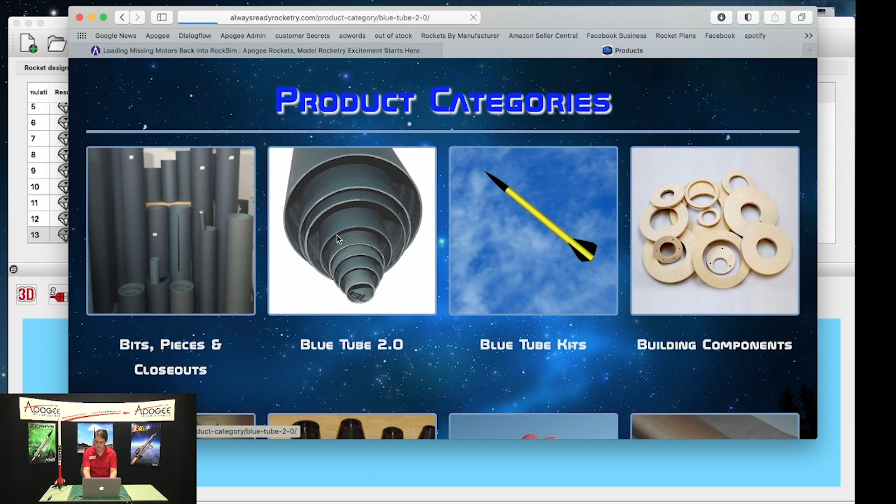The Blue Tubes are already in RockSim now, so this is different, but there are some manufacturers that are not, and you might be able to download the files from there. I deal a lot with the customer questions about, not how to do simulations, but more like I'm having a problem or this isn't in, so this is more of my knowledge base here. So to get to the file, hopefully he hasn't moved it. So here we go. Download the latest Blue Tube. We want to download.

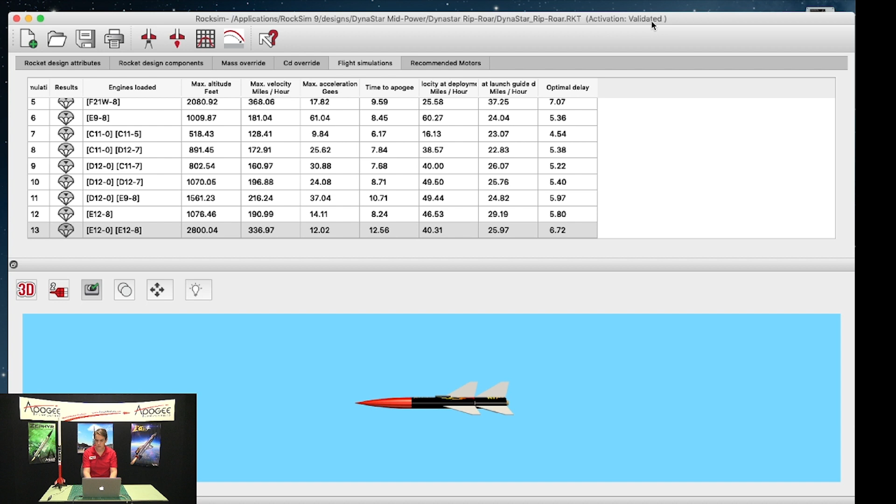So you can always do what I showed you before about moving them in there. The only thing is this will also be a body tube file, so you don't want to overwrite your existing body tube file. So the way to do it in RockSim is just make sure that this didn't download as a zip file. It needs to be unzipped. So if it is a zip file, you will need to unzip it before you start the import process. Looks like it downloaded as just a regular folder.

So what we can do to add files to RockSim, another way besides the way I showed you before, is to go File, Import, Database Files, and you can import motor files this way too if you load them from somewhere like ThrustCurve, or if you make your own motor, say you do experimental rocketry, or even if Aerotech or Cesaroni comes out with a new motor and it's not in the database, you can add it this way too if you download it directly. So yeah, we'll go File, Import, Database Files,

and the merge from path, in this case, we'll want to go to where we downloaded the file. So this is downloads, and that file, oops, was called the BTRS data. So we'll click open, so that we're pulling the new tube files from here. And then this checkbox says only import new materials.

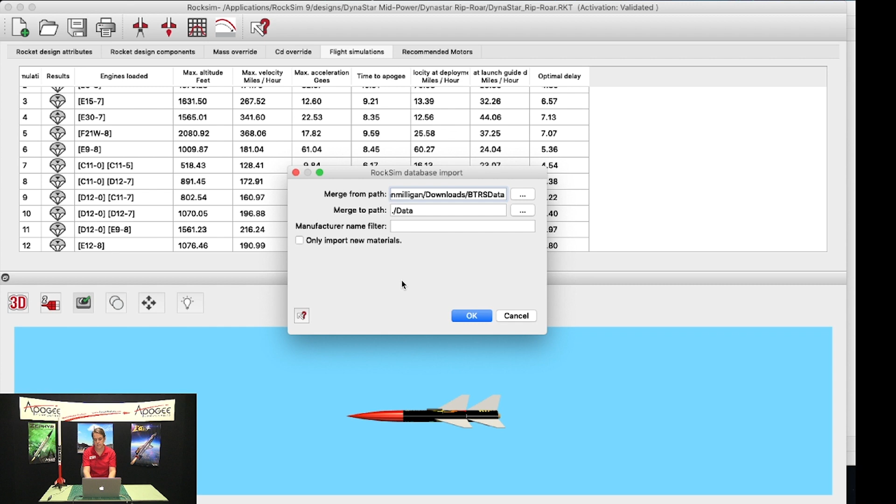So in this case, if the Blue Tubes are already in the database, then it won't import them again. But if say there's one new tube, it'll import the one. I'm pretty sure that our database has a different naming convention, so it may not recognize that they're already in there. So we'll just uncheck that. And then you click OK, and it will import.

And you can see here, because this was body tubes, it added 9 tubes, but nothing else really changed except tubes and couplers, because that's all Blue Tube is. So if you ever come across some parts files that you want to add to RockSim, it's really easy. Just get the parts databases, File, Import, Database Files. Same thing with motor files

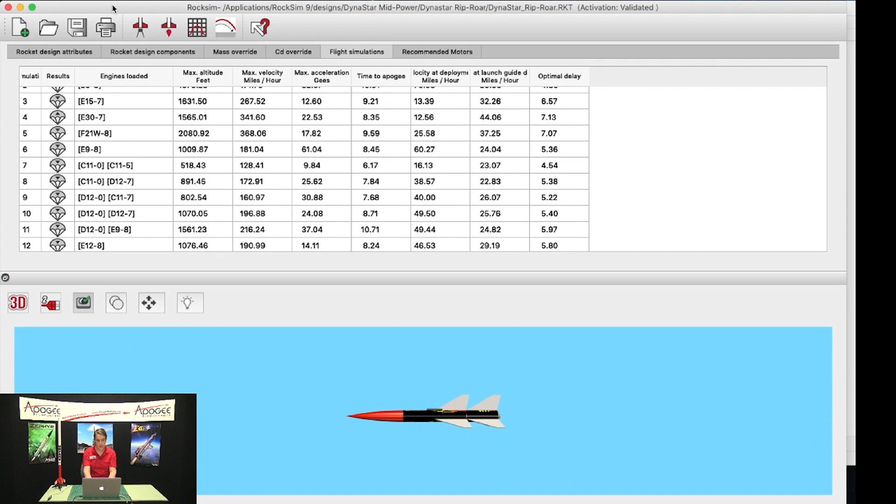for that. So another way to get motor files, if you're missing them too, you can go to thrustcurve.org and download them. I think I got rid of all my windows. And then that process would be exactly the same as what we did with the parts file. You can look up the motor.

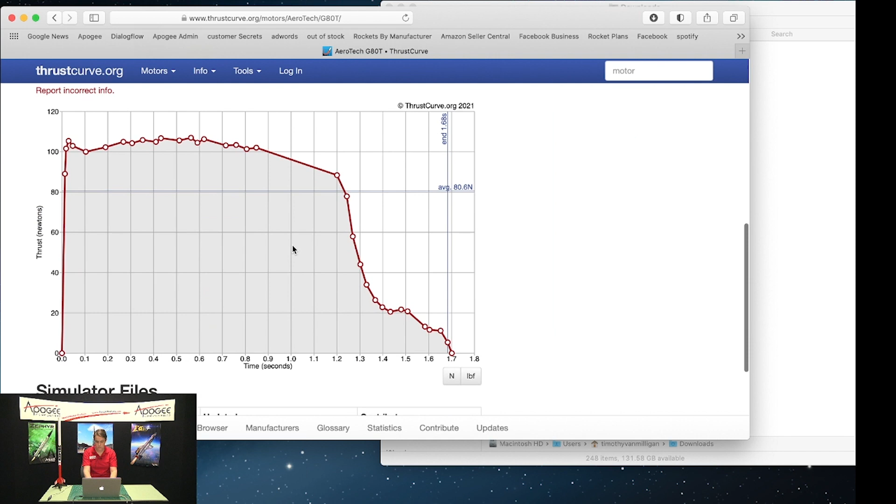You can search there, find the motor you need, make sure you get the right manufacturer, and when you click through and come down, the RockSim file, download there, and click that, and then it'll actually download from this page. They just updated this website, so I always forget how many clicks it is.

Okay, so I got my motor file there, so I can very easily in RockSim go File, Import. In this case, it'll be engine files, and then go back to my downloaded motor file, click Open. We've had a number of schools ask these questions, so I'm just kind of covering the basics.

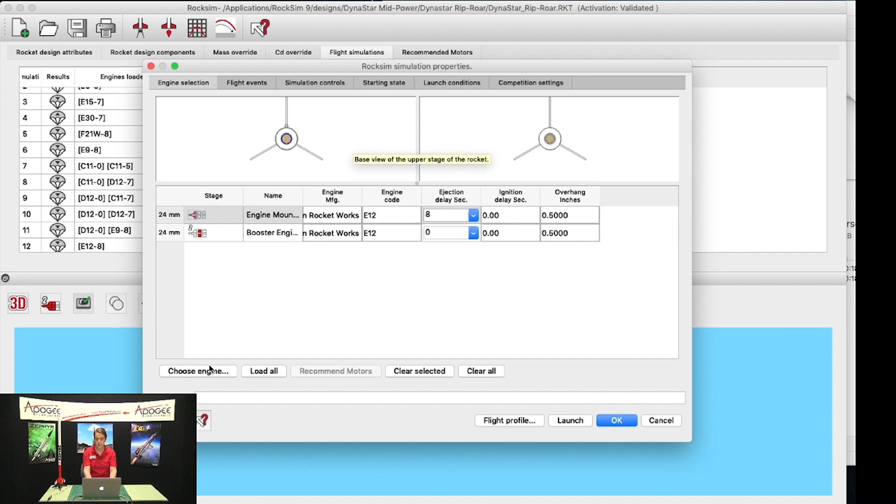So we imported it, and then you have to move it from the left to the right to actually activate it in RockSim. So when it's on the left-hand side, it's loaded into RockSim, but it's not activated, so you won't see it in your motor file list until you move it over. So once I've moved it over and click OK, now when I go to load an engine in my rocket, it will be in the database here.

The other way to get motor files, if you're missing individual ones, and this would be a pain to do if you're missing all of them, is you can actually go File, Reload Engine Data, and click the tab for Download Engine Data, and search from here. And so I usually just use the common name. It's the easiest way, unless you know the exact name. And sometimes people put them in differently.

So like Cesaroni motors start with like 120 G80 dash things, and if you don't have that memorized, it's hard to look up. But if you're just looking up, let's do an F120, start search, and then it found one motor. But you can see if I would have looked it up under the actual name, it said 56 F120. I never would have found it that way. So the common name is just the easiest.

Then we'll just download selected data. It's going to want to save it, so just click save. And then when you come back here, same deal. If it's on the left-hand side, you need to move it to the right to actually activate it. So now that motor is in there.

And that's why you wouldn't want to do this if you're missing all your motor files, because you would literally have to do every single motor individually, or kind of as a group, and that would be kind of a pain. The better option is to use our website and just download the files directly from there.

So looks like our pre-recorded video from Tim is not going to be available today. Just lots of computer problems this week for some reason. So let's see, does anybody have any other questions about RockSim? I'm trying to think of some other ones that have come up recently. Tim had the list and I didn't get it from him because he had the pre-recorded video, so I don't have the list in front of me about what questions there were. Let's see.

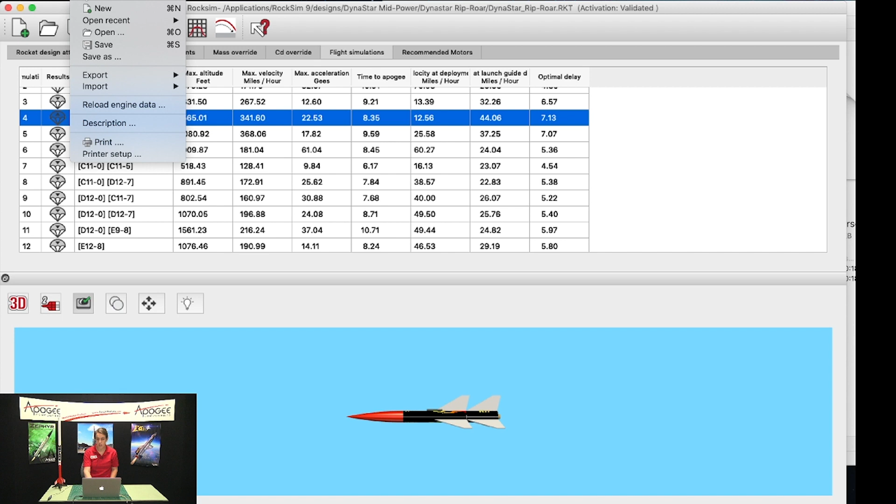I'll show you a little tip that's in the video that Tim did, but we'll just kind of sneak it in. So one of the issues that's coming up when people go to print in RockSim is it seems like it's not printing. So I've got this rocket and say I want to print templates or something from it. I go to File, Print, and then this screen shows you all the different things you can print for this kit. So you can do rocket drawings, the side view, the top view, the base view,

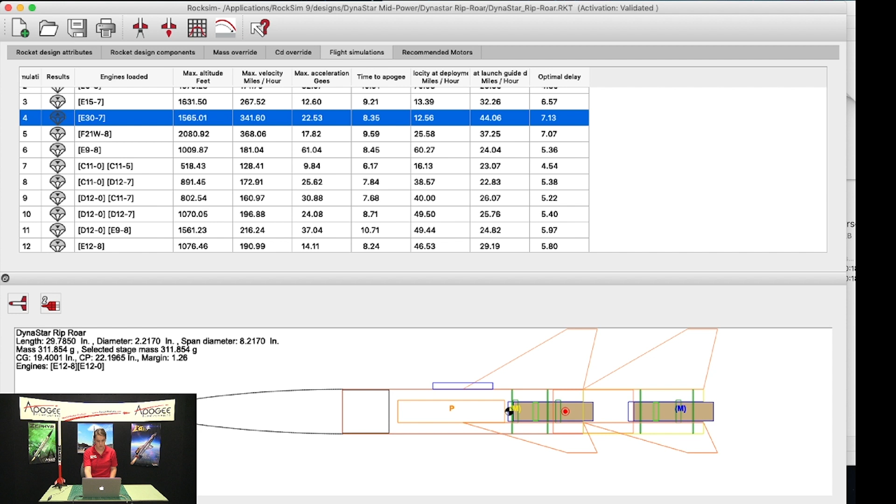Rocket drawings, if you want the side view, you can. Just be aware the rocket drawings do not print to scale. They size to your paper. So the way to actually get a scale drawing, we have a video tutorial on the tutorials page on how to do that. Basically, you have to export or print to PDF the view, and then put it in a drawing program like Inkscape or Paint, there are free ones out there, and then scale it from there. So unfortunately, it's not one click and done, but it can be done.

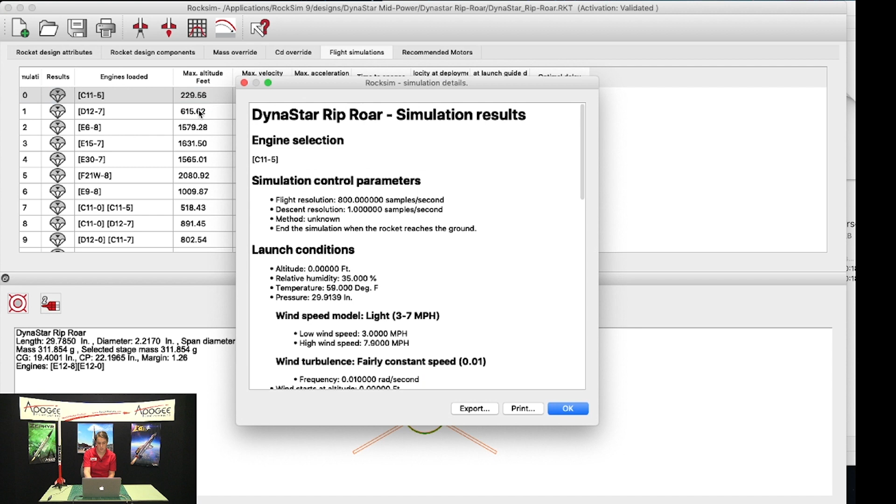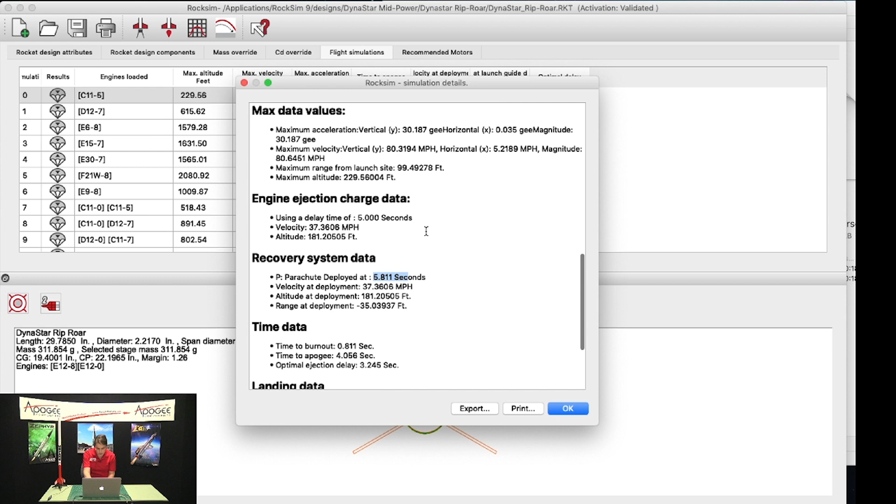So this one has the down arrow, and if we go into the display details, so flight details. The parachute deployed at 5.811 seconds, but let's see here. I'm looking for the Apogee time. Oh, time to Apogee there was 4.056. So it deployed slightly after Apogee, basically on the way down.

So if you think of it this way, the arrow is pointing down because the rocket was going down. So your parachute deployed slightly after Apogee. In this case, it was about a second later. So the rocket's starting to pick up speed again, which, if it gets to a certain point, can be dangerous because your parachute could rip off. But 1 second is usually the wiggle room area that works okay for that.

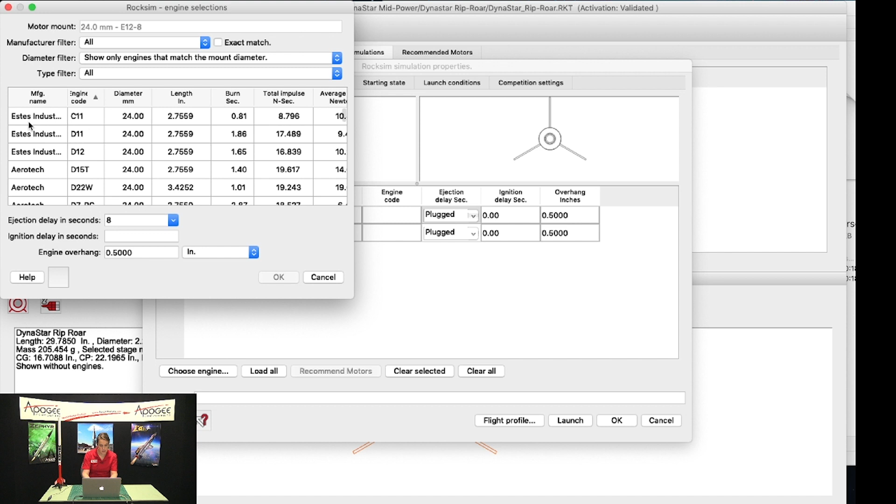Let's see if we have any other. Let's choose a motor here. Oops, let's clear all. So let's choose an engine and put in a really short delay, like 1 second, just to show what that looks like. Oops, I typed in an 8. So in this case, this rocket crashed. You can see the rocket's sort of bent in an L shape and there's a little X. This rocket crashed because, I assume, it was already on the ground when the parachute popped out. So that little icon tells you that.

And if you want to, you can go to the 2D flight profile and see the visuals of this too. So if you run the simulation, we're waiting for that parachute to pop out, and you can see it hit the ground. I'll pause this. It hit the ground at 7.88 seconds, but our delay was set to 8 seconds, so that's why it crashed: the parachute came out too late.

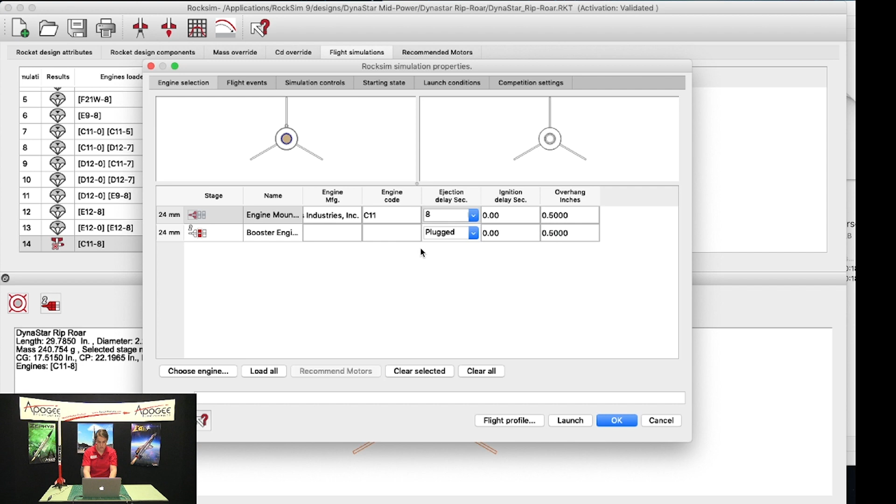If I change this to 1 second and we launch it again, you will see that in this case, we've got the little parachute icon with the arrow pointing up because the parachute popped out while the rocket was still going up in the air. And since our apogee was about 4 seconds, like it showed on the first one, it popped out 3 seconds early. And you can see when you look at the data the speed at which your parachute popped out. So when it popped out after 1 second of delay, it was going 50 miles per hour.

And 50 is about the breaking point for a lot of parachutes, where it's just going to rip that parachute directly or zipper your rocket or something, because it's going so fast. Like throwing your hand out the car going 50 miles per hour. Think about how much force is on that. That's what your parachute's going through there.

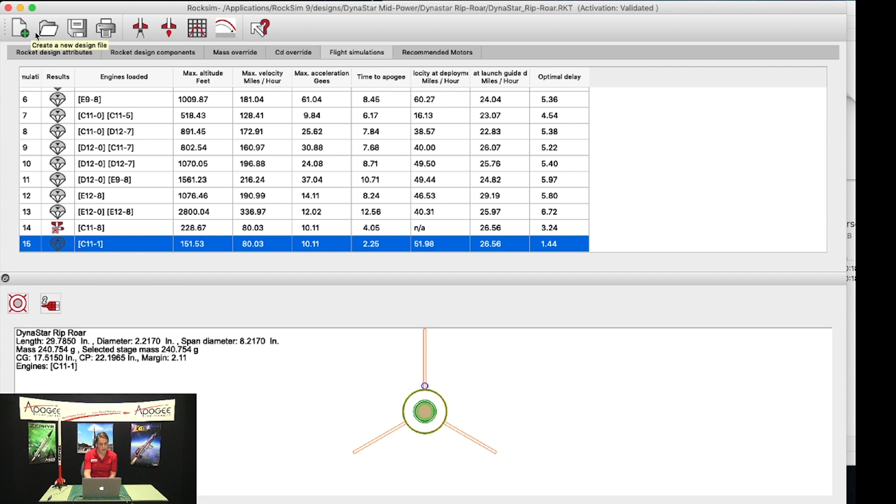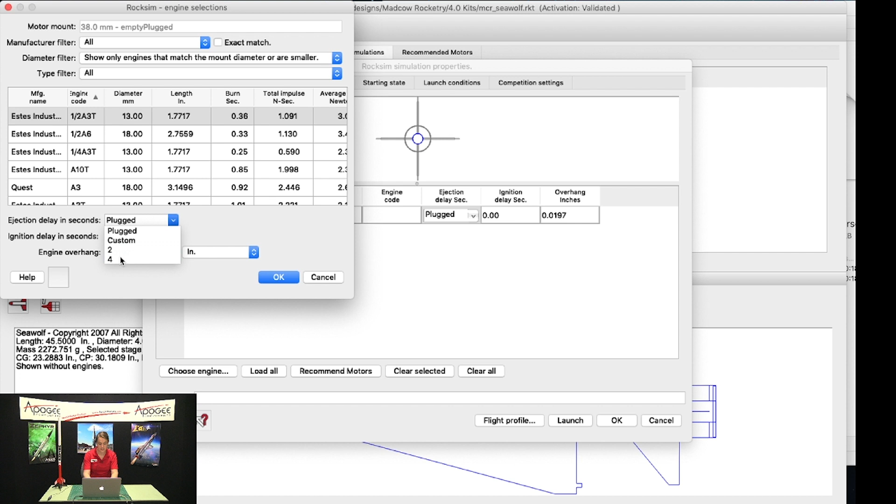Then another icon that shows up. Let me pick a bigger rocket. Actually, let's go here. Really heavy rocket. Oh, it's in my version 9, so that's okay. So this is a 4-inch diameter rocket, about 4 feet long. And I'm gonna throw a 1/2A into it. So this motor is supposed to launch little tiny rockets, and we're putting it in a big rocket. And then we're gonna go ahead and launch this.

So as expected, your little tiny motor is not gonna be able to launch your giant rocket. And so what you get is this little icon. This is a rocket with an X next to it, basically saying we couldn't get off the ground. It's not working, something's happening. In this case, it's just because you put a tiny little motor in a big giant rocket. So that's what that means.

And usually you can check and see a couple reasons why that might happen. Or if you get a launch that only goes, say, 30 feet, you put a motor that's the appropriate size in it, and then it goes 30 feet. Things to look for are check your launch angle when you're putting your motor in.

Under starting state, your launch guide length, you've got the length there, but also the angle. Like this is angled 4 degrees into the wind. There are some times where people get really confused because their rocket doesn't launch at all. Everything looks good, or it only goes like 30 feet and they put an M motor in it or something big. And what it is, their launch angle is 90 degrees. So the rocket's launching, you know, horizontally.

And so it's basically launching across the ground. And so obviously your rocket's not going anywhere if you're launching it this way. You're not going to get any altitude. You might get a little bit if it's a little up, so you may see that there. So check your launch angle.

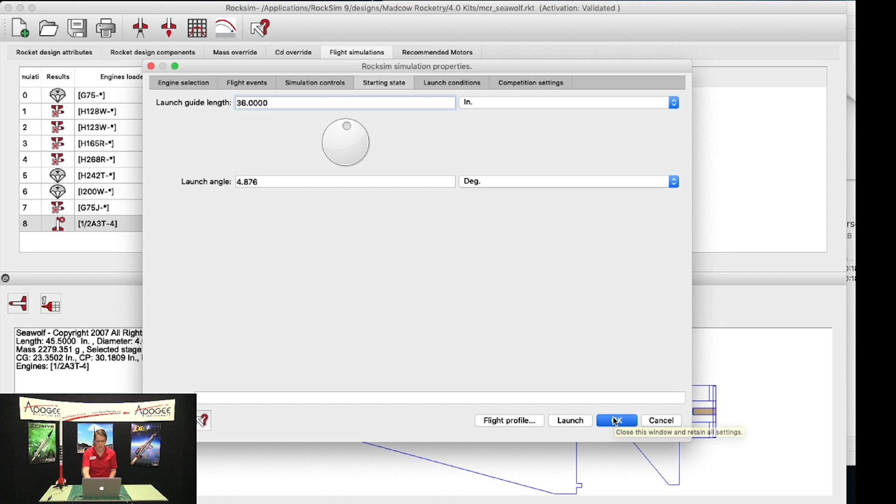Obviously check your weight versus your motor. Sometimes it might be as simple as one of your parts is really heavy. You don't realize you grabbed a fiberglass version of a part instead of a paper tube or something. So those are things to look out for if you get those.

There is another icon that will show up, and I don't have a quick and easy way of generating it that I can think of, but it looks kind of like the rocket, except it has no nose cone on it. So it's just like a rectangle, and it's kind of all gray. And then usually with that, you'll also get NaN showing up in your columns. NaN stands for not a number.

We see that a lot, especially with older designs, and the common cause of that is one of your parts is made out of a material like custom, that when you go into the parts database, you go in here, and material, instead of saying polystyrene or balsa or whatever, it literally just says custom. You can also have problems if you have a material in here that's not actually in the database.

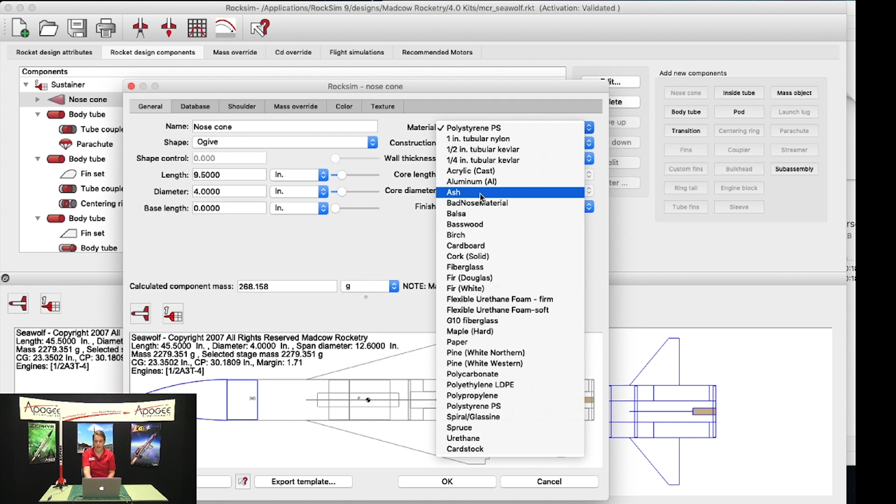That happens if you get a kit file from somebody who added a material to the database, and say you're making something out of a really odd wood, you know, carve a nose cone out of cherry or something. And you make that, and then you send the file to your friend who doesn't have cherry as a material in their database. So basically, usually it's something in your parts file that will make it go NaN.

Essentially one of your ingredients in your rocket has a material that RockSim doesn't know what it is, so it can't calculate the density, which means it can't calculate your center of gravity, which means it can't launch. So if you ever get the NaN message there, the usual culprit is one of your parts. A lot of times it's the fins. Go check the materials and make sure it's not

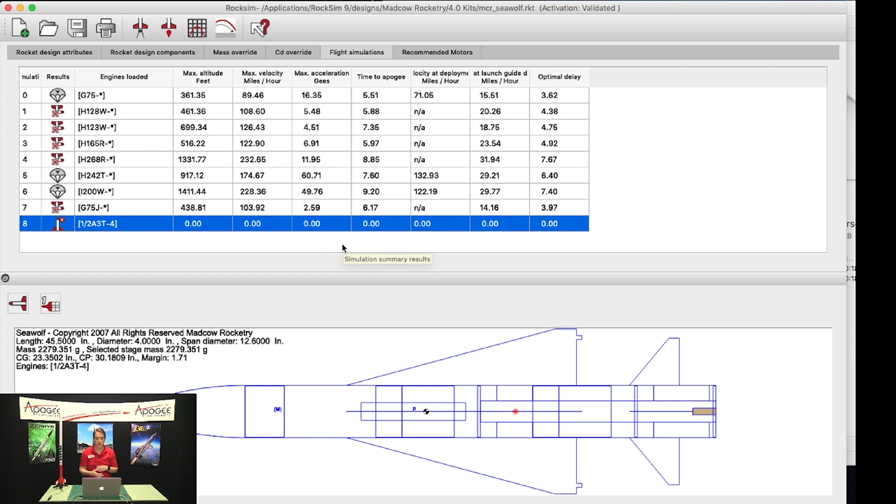custom. And if you have some sort of weird material, the other way to check is to look at your weight, so the mass of your item. If it says 0, there's probably a problem there. It's made out of a strange material.

If you need to add a material to your database, that's actually really easy. So say you made a rocket out of some scrap you found, a junkyard, your house, whatever, and it's just made out of material you can't simulate at all. It's totally different. To do that, you go to the rocket menu and then edit database materials. And this is a list of the densities of all the materials in RockSim. So you've got plywood, you've got nylon. This is every material that's used.

So to add one, you just click Add New at the bottom. Sorry, it's scrolling very slowly. And it's over here now. So you can edit these or delete them if you're never going to use something, or you can click Add New and type in, test material. You're going to put the density in this column, so you need to tell it what units you're using for the density, and there's a bunch of different options.

Fixed dimension is basically kind of copy what's up here. Most of these are because it'll calculate based on the size of your item. You'll always want to check the rocketry use button to turn it on, and then you'll check the parts that it goes to. That's moving very weird. So if it's a nose cone part, do that. That way it'll show up in your materials list when you're making a new item.

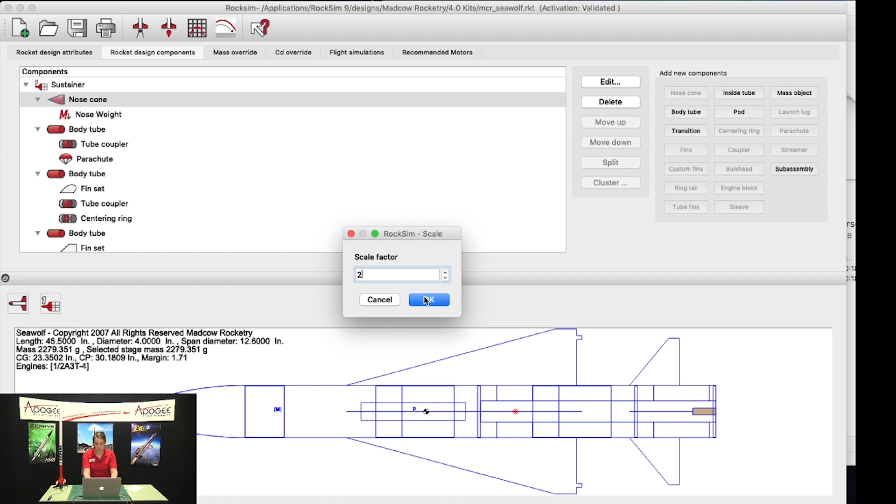In this case, we'll just do 2 because it's a little easier to see. So we're going to do a scale factor of 2. So now you'll see the diameter went from 4" to 8 inches, so scaled up by 2. So usually your external parts are going to easily scale. So your nose cone will now have a diameter of 8 inches, but you have to realize that all the factors duplicate by 2. So we've doubled this up, so now we're looking for an 8-inch nose cone.

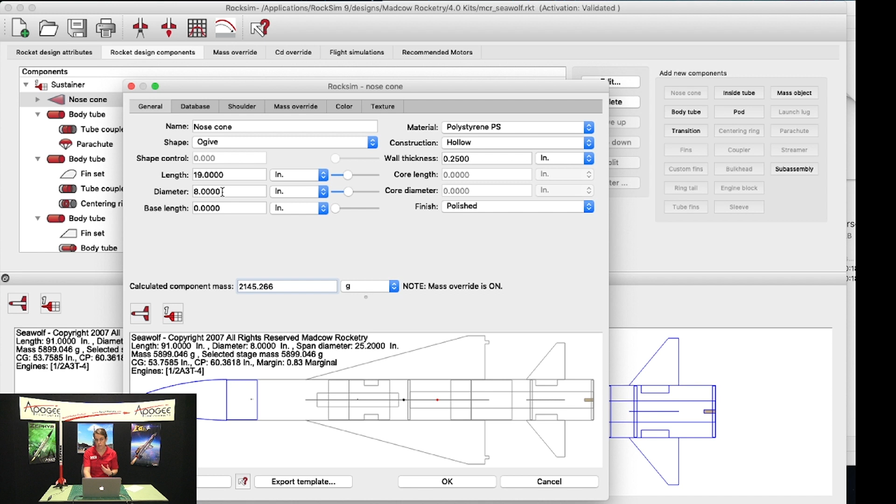We go to the internet, we look up an 8-inch nose cone, and we can find one, but it's not 19 inches, it's 12 inches, because that's just what's available. So then you'll have to kind of tweak it from there. And then the other things, like we scaled the external tube by 2, well, now your motor mount tube also went up by 2, but 2 times, say, a 38mm tube is an odd size.

So once you have it scaled, your external body tube. So I want this to be, instead of being a 29mm rocket, I want it to be a 3-inch rocket. You can scale your outside tube, and then from there you have to tweak kind of everything else, but your general scale should be the same. So stuff like your fins should be hopefully okay because the ratio should be the same. But when you get to the internal components, like the motor mount tube, you're usually going to have to change something because it just doesn't scale up evenly.

So no matter what, you're kind of stuck with some oddball sizes a lot of times. But it's a good starting point saying, okay, I want to upscale this Aspire kit and make it a 3-inch rocket. Let's do the scale in RockSim, and then from there we can look at what parts are available for sale on the websites, and then go from there.

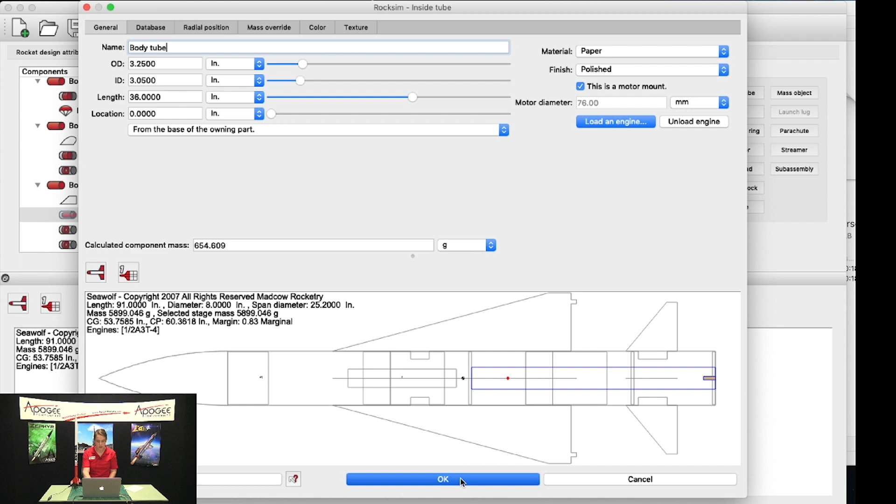And then tweak them, and you can edit everything, and then just remember to save once you've changed your file. You might want to save as, so that you don't override the 4-inch version. So you could do a save as, and then this is a Seawolf 8-inch custom, so that way I don't lose my original file if I ever want to fly that. So yes, hopefully that answered Catherine's question there. So I think that's all the questions.

You don't see any more questions in the chat? Okay, my chat's set up weird, so I didn't do that.

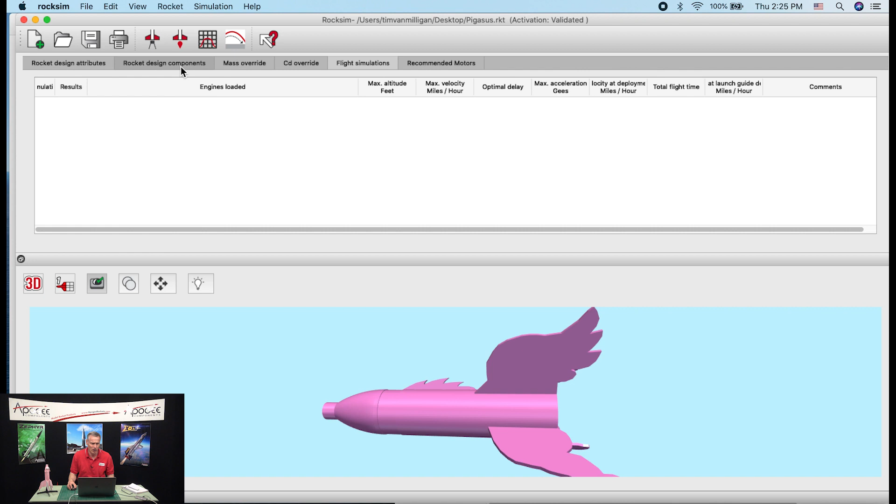And this is the file that you'll find on our website. It's in 3D right now, and if we drag it around and zoom in here, you can see that these are coming off the tube perpendicular, not straight up like we'd want them to. So we're going to modify this design to make it just like the real one that we've got right here. We want it to come off straight. All right, so for that, we need to do it as a pod, as I said. So we're going to come here to the Design Components tab, click on that, and come down here and find our fins.

So we've got a foot, and I'm not sure which is the foot. I guess this is the foot right down there. That would be a foot. We got a fin set 3, the Razorback, which I think is this Razorback right here, and then 2 wings, and I think these are the wings that we're going to modify.

So first I want to open it and just confirm it. So that is the wing, and you can see the shape there. Now the version that I'm using is not the version that you have currently. You have RockSim version 10.1, which is the latest on our website. We are working on RockSim 10.2, and it's really close to being ready to release.

We're calling it 10.2 instead of 10.1.1 because it has new features. Whenever we just do a bug fix, then it would be the last digit. So if there's 3 digits, it would be the last one. So it would be 10.1.1, which means it's a bug fix to version 10.1. We're going past that to 10.2, which means it's a new version that has new features in it.

And one of these new features is this screen right here, which we decided to fix because there were a lot of people that didn't like the custom fin editor screen, because the main image of the rocket in 10.1 was squished. So we made that larger so you could actually see it, and you can now drag it larger or smaller like you did before. You can also drag this graph here. You can see I can make this larger or smaller as well.

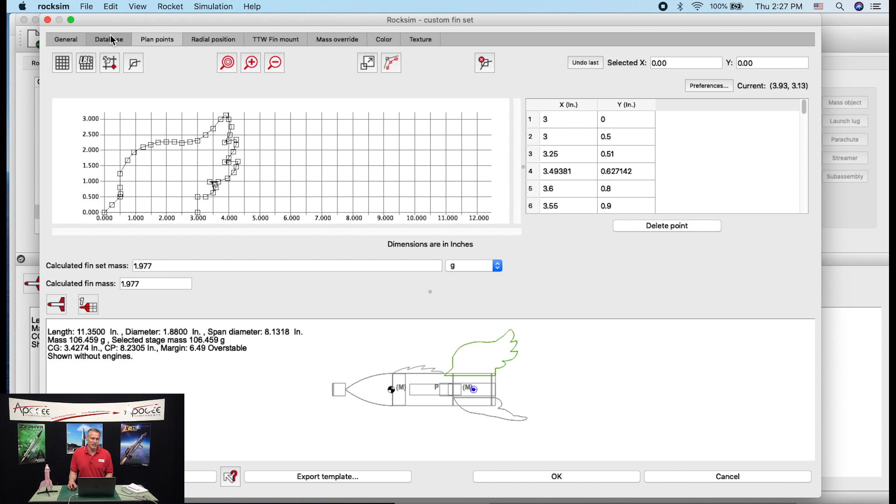All right, so this is the fin that we need. So what I want to do is to make sure that this fin is in my database, because I'm going to delete the fin from the rocket and then add it back. And I don't want to do all those points again because that's a lot of points there. So I'm going to save it to my database. To do that, go here to the Database tab, click on that, and now we're going to add this to the database, and we need to fill out these forms here.

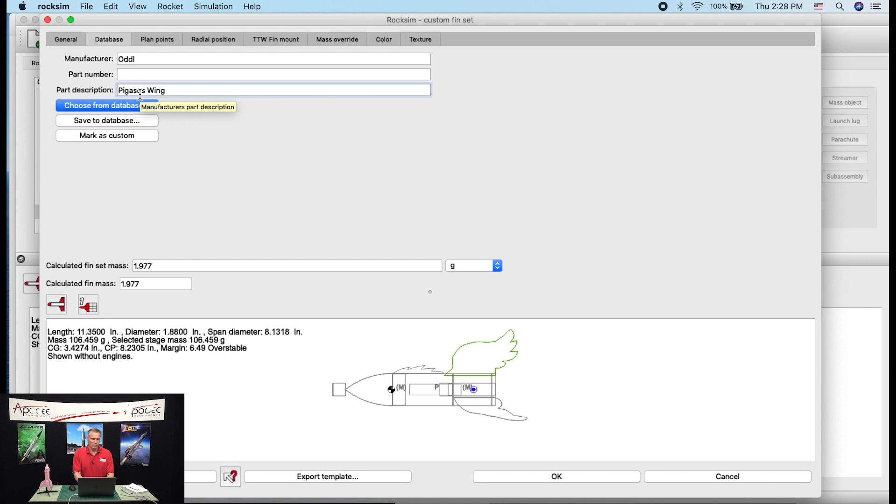So the manufacturer of this is Oddl Rockets, ODDL, and I don't know what his part number is, but I'll just give it a description. I'll call this the Pegasus wing fin. And then I'm going to save it to the database, and it's going to copy this stuff right up here, and it's going to copy it right down here. And this is the final chance you get for putting it in your database. So I'm going to say yes, okay. And now it's in the database.

And if I actually go to the database, so if I go to choose from database, I should see it in there. And there it is, the Oddl Pegasus wing. So now I know it's in there, so everything is okay. So I'm just going to cancel out of this screen and cancel out of here. It's asking me if I want to save my changes. I didn't really make any, so I'm going to say no.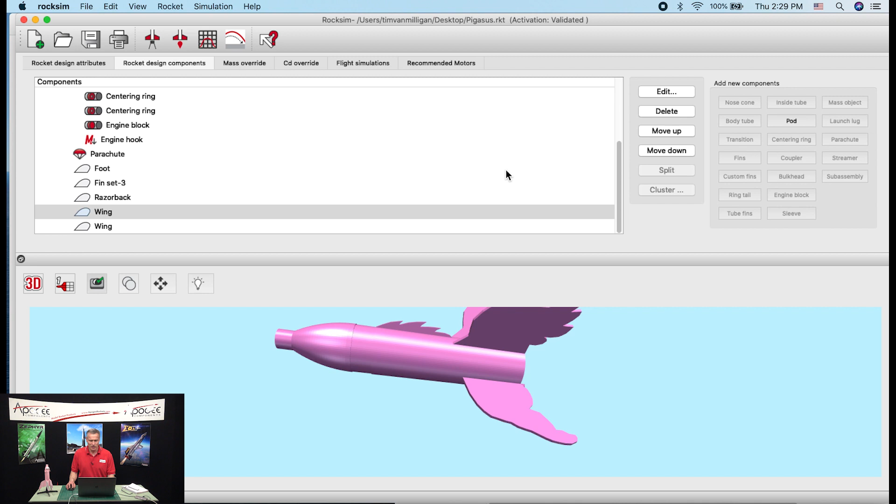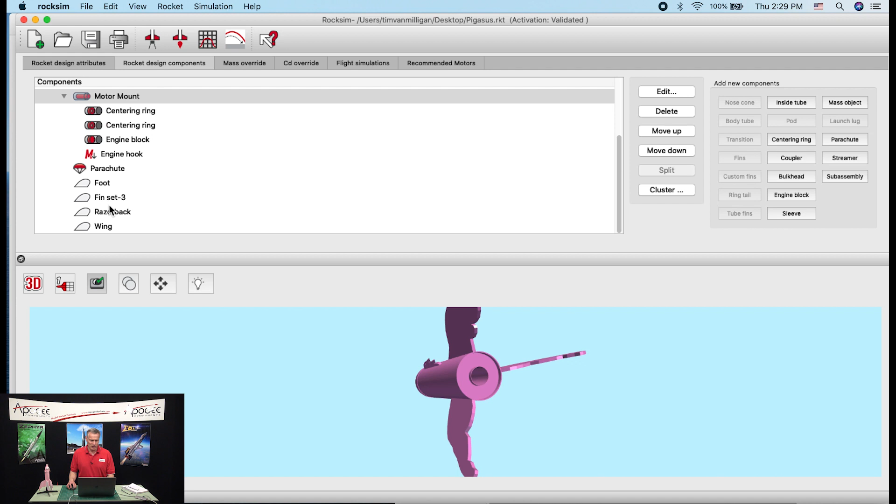And then I'm going to delete this from the rocket. So I'm going to make sure it's highlighted and then come over here to delete, or I can also use my mouse. I can right click and say delete. And it's going to ask me, really delete? And I say yes, delete it. Okay, and so you can see that one fin just went away. Now, before I take away the other one, I want to see where it's exactly positioned. I just want to take a quick look.

So I'm going to open that back up. Again, it opens up this screen because it's a custom fin. And I want to see the radial position. And it's at 30 degrees. So if I look at the back of the rocket, which is this icon right here, you can see that it's 30 degrees off of vertical. Okay, and that's what I was looking for. So I'm going to click OK. And now I'm going to delete this one as well. So now they're both gone.

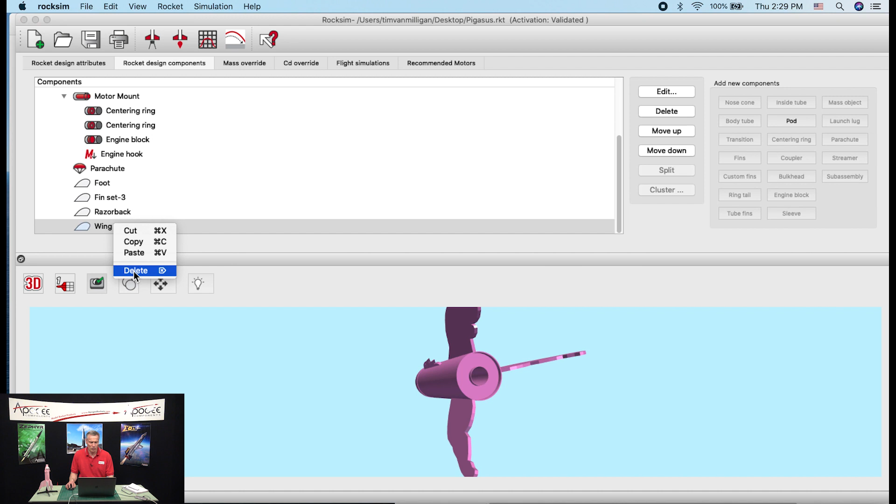Okay, now is the part about adding them back. And I'm going to have to add both of them back one at a time. So first, we got to know where we're attaching this new fin. Or, well, let me tell you the process. The process is going to be, we're going to add a pod to the tube, and then we're going to add a fin to the pod. Now a pod is a placeholder, and it's a placeholder that allows us to attach parts to the outside of the rocket.

Now other placeholders, you've seen them before, but you just didn't recognize them as a placeholder. So if you come up here to your screen and you see the word sustainer, that's a placeholder. That means I'm going to add parts to that as a group. And then if you had a booster 1 and a booster 2, those would also be placeholders for other parts. Another placeholder that you'd see in your rocket is a subassembly, where you're attaching parts to that, and it's just a group of parts that are kind of grouped together.

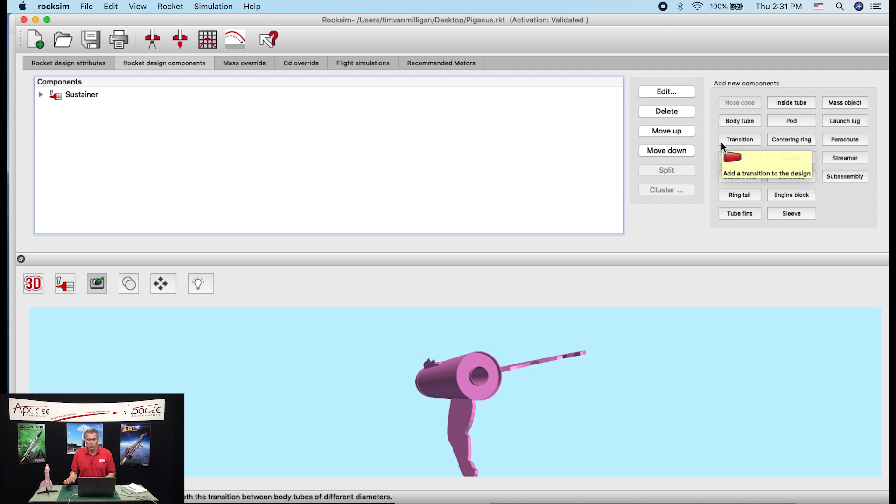But the one that we want to use is called a pod. So first we need to attach it to someplace in the rocket. And I am going to attach it to the body tube. So make sure the body tube is highlighted and then click on pod. Okay, so now we have the rocket, and we're looking at it at the aft view. So let me look at it at the side view.

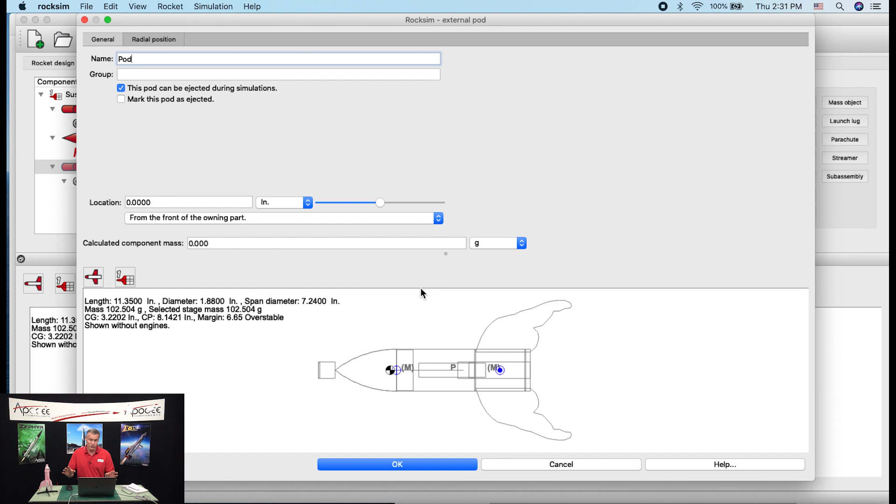Okay, so right now, this is the other new feature that we've added to RockSim version 10.2, which you don't have yet, but it's coming really soon. And that's a visual indication of where pods are attached. We talked about this in previous editions of RockSim Live. As you see me using it, I was talking to myself and I said, hey, what we really need is a feature that shows you where the pods are attached.

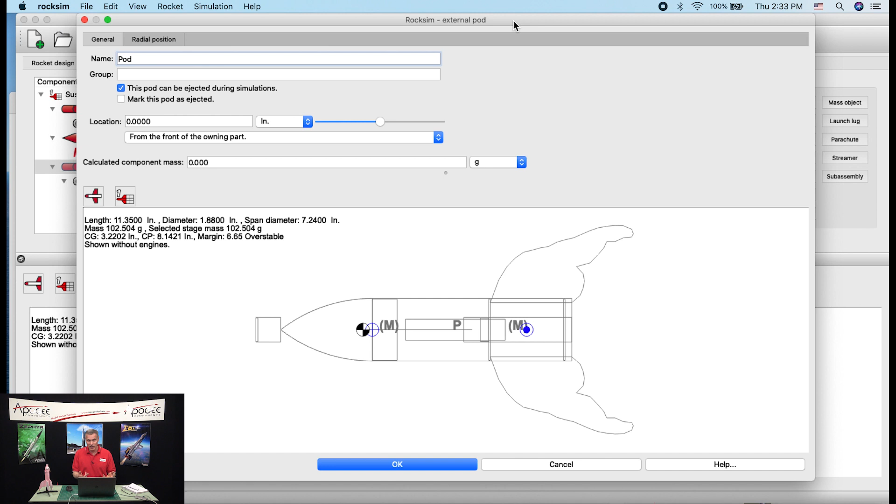So our new visual indicator is this circle here. It's just with a cross right in the middle. It's kind of like the CG symbol, but the opposite sides aren't shaded in. And right now it's right next to the CG symbol, so it's kind of really weird. I'm zooming in. To zoom in, you use your right click on the mouse, and it brings up this menu, and then you can say zoom in, and you can see it zooms in.

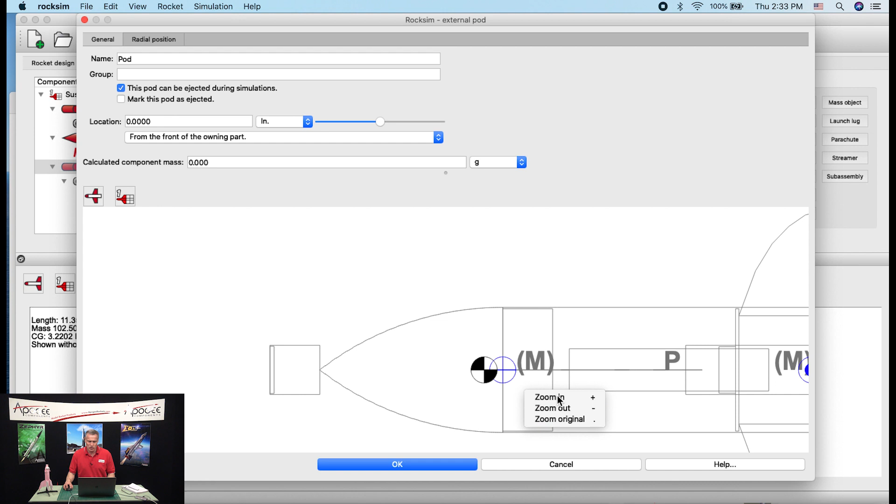So this blue one right here is the new symbol of the pod, and you can see if I shift it around, I can move that location of that pod, because right now it's just a placeholder, and it's not a part, it's just a collection of parts. So we need something to tell us where it's attached and where the front of that pod is attached.

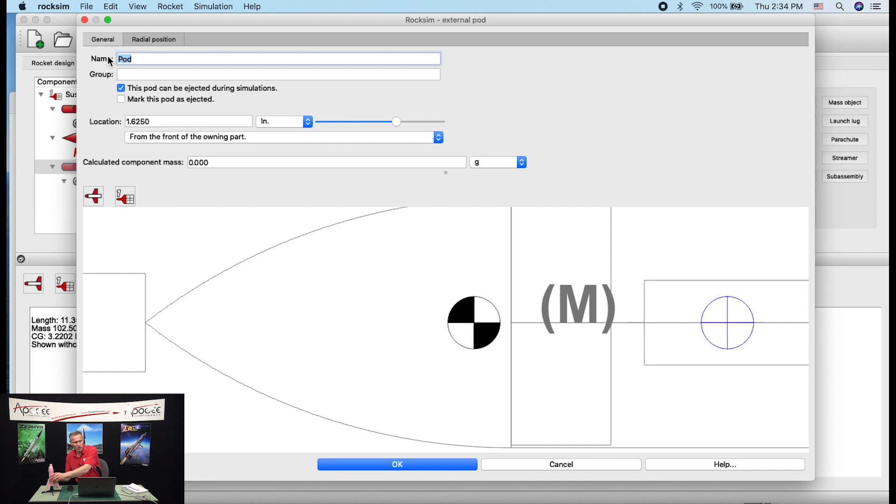So we're going to have two of them, a starboard and a port. Your starboard is your right side. We get this from nautical terms like aeronautical. Nautical starboard is the right side, port side is your left. So we're going to do the right side first. So we're going to call this the starboard wing pod. And this pod cannot be ejected during simulation, so I want to make sure that it's unchecked. And I'm going to say OK.

So in the 3D you don't see it, but you do see it in the 2Ds. And right now I'm not seeing it. Okay. It's in there somewhere. Maybe you only see it on the pod one.

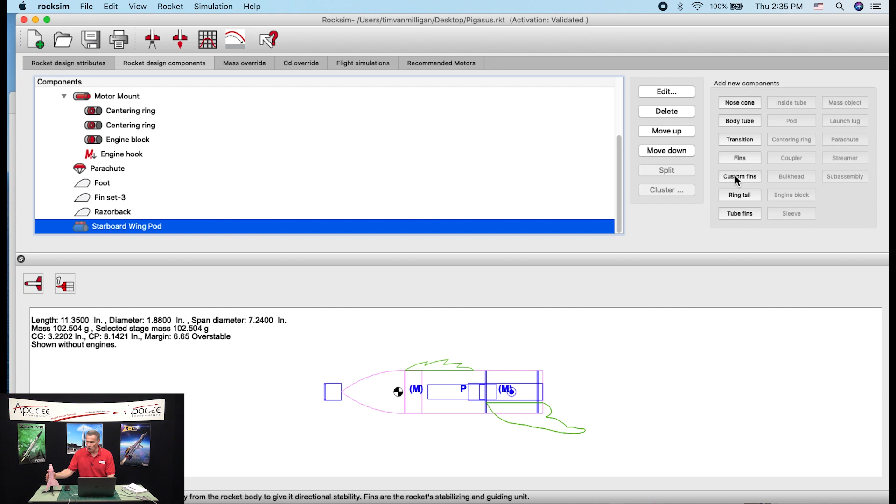Okay. So anyway, let's add our fin. So first you got to highlight it like I've done, and now we can add fins. And this one fin was a custom fin, so I'm going to hit that, and it brings up the database of parts. And look, there's our fin. So we're going to click OK on that, and you can see it loaded it in there, and it loaded three of them actually.

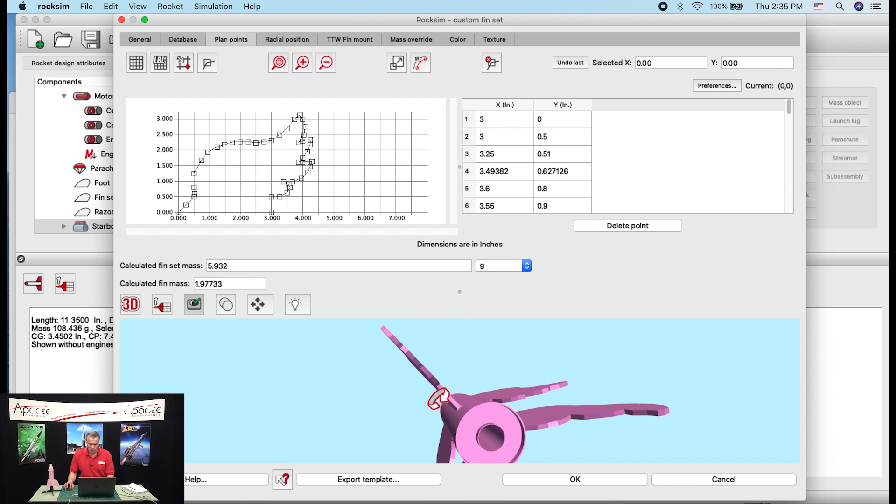Let me zoom in here. So I'm kind of looking at the back of the rocket, and it's these two right here. Let me change the color of them so you can see the color better. And I want to make sure I copy that color right there to my custom colors. So I'm just going to throw it there and then make the color blue. Click OK. So now you can see them. Oh, and look, it actually added 3.

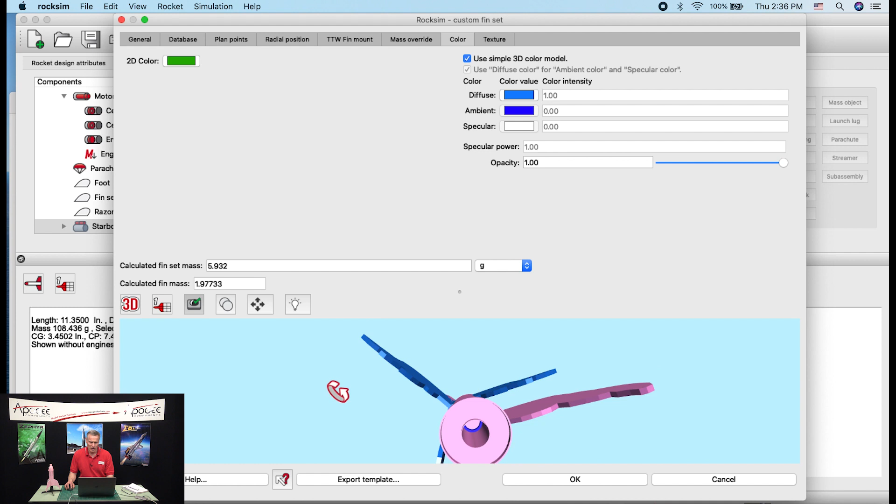And if you notice, it's kind of like they're attached to a tube and they're coming off perpendicular to that tube. We only need one fin here. So I'm going to actually go to my general tab, and I'm going to change my fin count to 1. And there it is, our one fin, and it's coming off radially, but now we want to start changing that position.

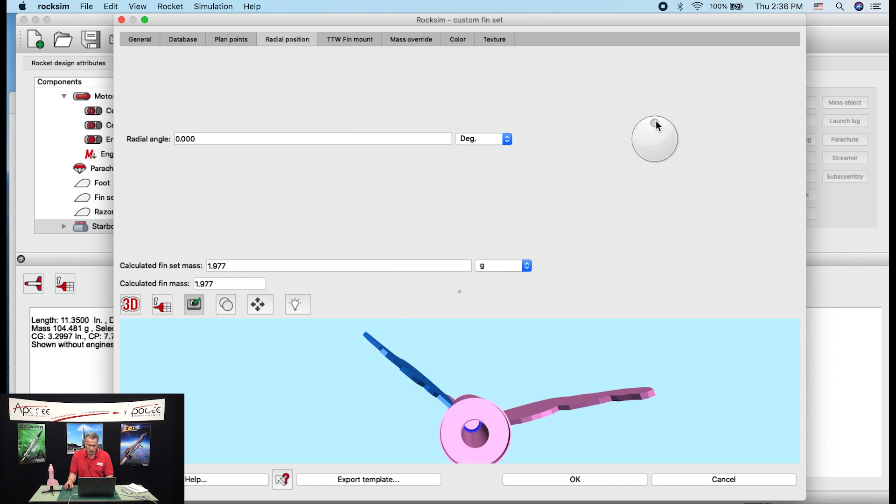So what I'm going to do is I'm going to go to the radial position tab, and I want to now see if I can change the radial angle. You see that? I can change that right here. So I'm kind of looking at it from the rear view. Let me see if I can get the rear views better. Okay, so let me zoom in. Remember how to zoom in. You right click and then you select zoom in, and it brings up this here.

And we need this to go vertically off here. So I'm just going to rotate this around till it's straight up and down. Okay, and I'm going to make it 0 degrees. Just going to type it 0. Okay. And then I want to see from the side view where it's located. So right now it's kind of in the middle of the rocket.

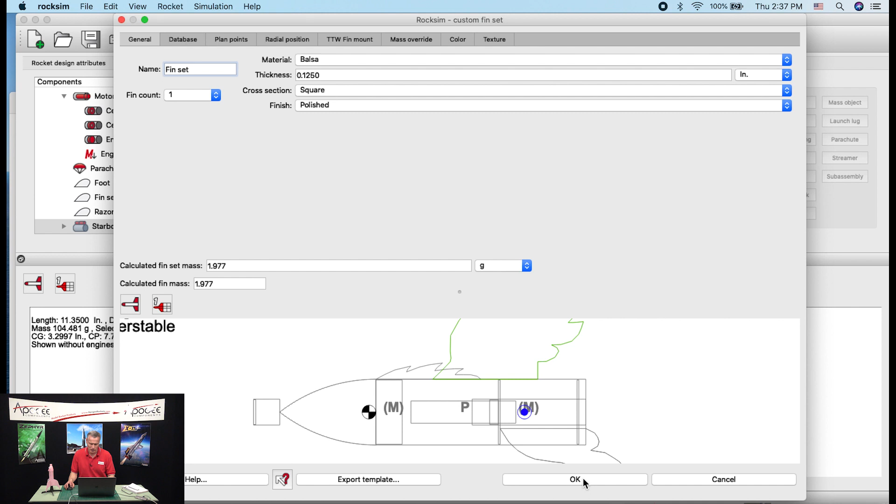And to change its position, normally you would do that on the General tab, but you don't have a way to change it from this tab. So where you're going to change it is on the Pod tab, or on the Pod part. So we're going to now go back to the pod itself and adjust the position even further on that screen. So I'm going to click OK here. Now I'm going to go to my pod, and I'm going to double click it to edit it.

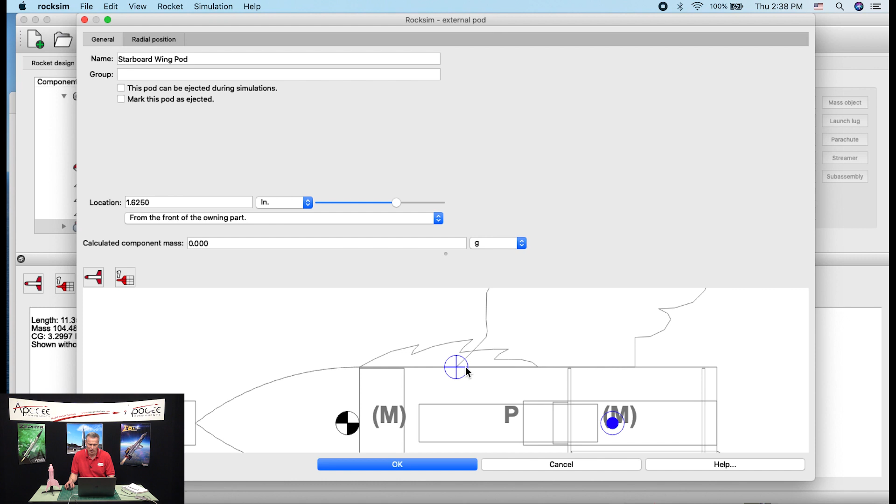Okay, so now we're looking at it at the side again, and now we can see that pod position, and you can see the fin is attached right there at the location of the pod, and here's the fin coming off here. Okay, so now I got this location tab here. You can see I can slide it here, and I'm going to change it from the base of the owning part,

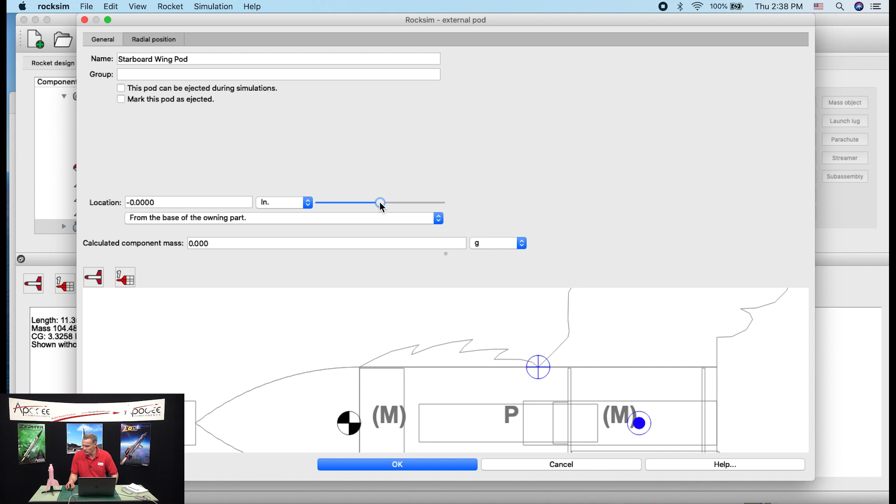and now it goes in reverse, and I'm going to just slide it all the way to the back because I'm looking at the rocket. If I look at the rocket, the fins are right at flush with the back edge of the tube, so I can see that on my screen here. So now that puts the forward and aft location, and now we need to adjust the radial position.

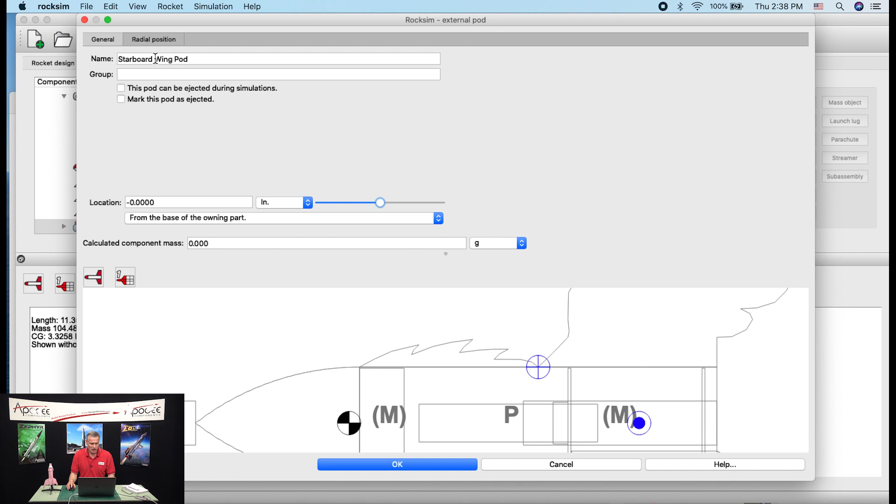Okay, so now I'm going to look at it from the back of the rocket again. I can make this a little bit bigger, and I'm going to zoom out just a little bit. Okay, so my fin is right here, and I need it to be coming off right here. So I'm going to go to the radial position here, and I want to uncheck these. See, right now I'm trying to grab that slider, and I can't do anything, but I can do the radial angle. And I'm going to set it, we had it set at 30 degrees before. So I'm going to hit Enter or Tab to accept that angle.

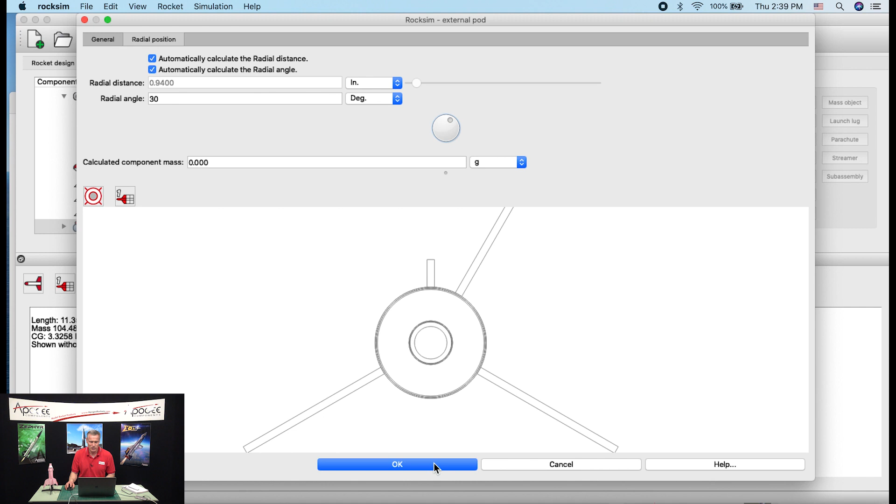So now it's at 30 degrees, but now it's coming off perpendicular again. But that's okay, because we can adjust that on the fin tab, or on the fin screen itself. Remember, this is kind of back and forth a little bit to try to get that position just the way we want it. So I'm going to click OK on this screen. And then I'm going to go back to my fin. So I'm going to click the down arrow here, and then just slide down here, and then select the fin, and I'm going to double click, or I can hit the edit button over here, and it will open it back up. Okay, now we're back to where we were before.

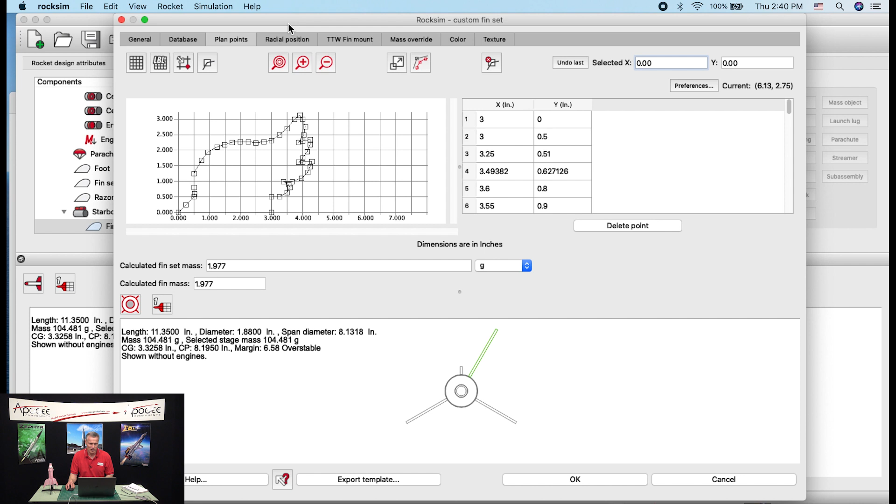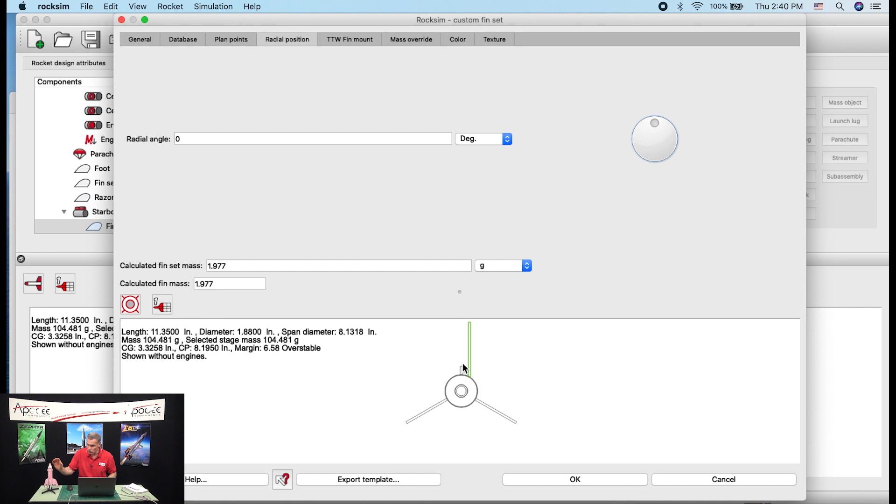I'm going to go back to that radial position tab, and now I'm going to change it back to 0. So I'm just going to go over here, highlight it, and type 0 on my keyboard, hit the tab key, and you can see it snapped right where we wanted it. All right, and then the question is, was 30 degrees actually good? And it could have been off a little bit further. Oops, stay in there. I'm moving my Pigasus rocket around, looking at it, making sure I got it right. But actually, I like this. So I'm looking at it from the side again.

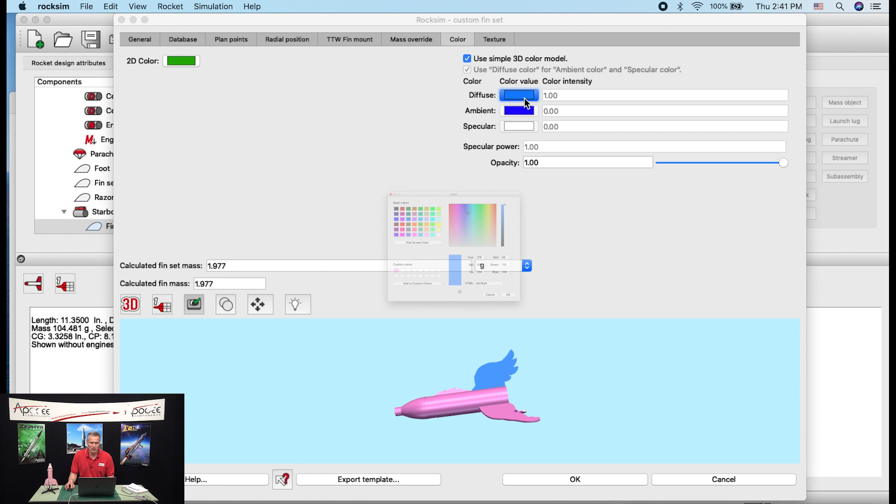Now here's looking at it at the front. I can zoom in, zoom out. Okay, now I'm going to change the color back to what it was. So I'm going to go to Color tab, select my 3D color, and then, since I saved that custom color over here, I'm just going to select it and click OK. So now we have that fin. I'm going to click OK here.

I'm going to go back to the pod, double click on it. I'm going to look at it one more time. Do I like that position? Or maybe I want to adjust that radial angle even more. No, I liked it at 30 degrees. So I'm going back to 30 degrees, hit the tab, and click OK. All right, so now we have a starboard wing pod.

Let's see if we can do this a little bit faster the second time. So this time I'm going to do a copy and paste and see if that works. And if it doesn't work, then we have to do it the long way. But if it does work, it will save us a lot of time. So to copy and paste, we'll select the item, right-click with your mouse, and it brings up this little menu here, and we're going to do a copy.

And now we need to tell it where to paste it. We need to paste it back to this body tube up here. So I'm going to highlight that body tube and then hit paste again. And you can see it pasted it right down here, and it's identical. It's an identical copy. So there's actually two fins right here coming off the top of the rocket.

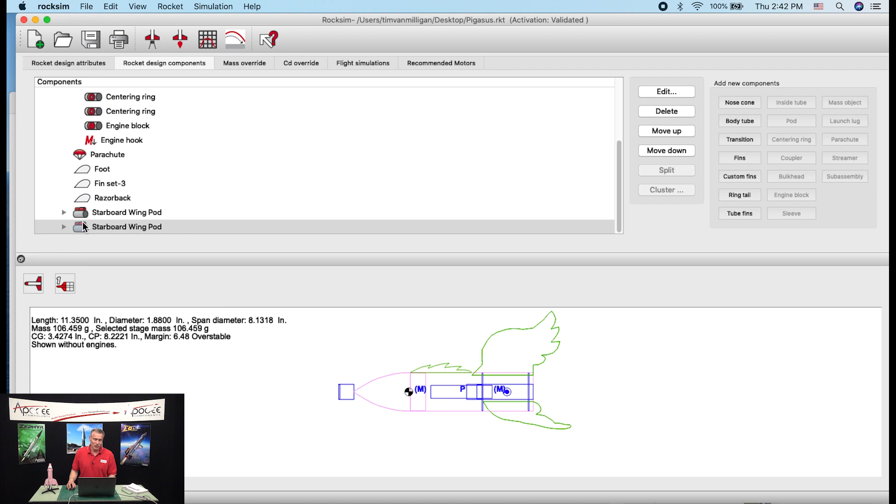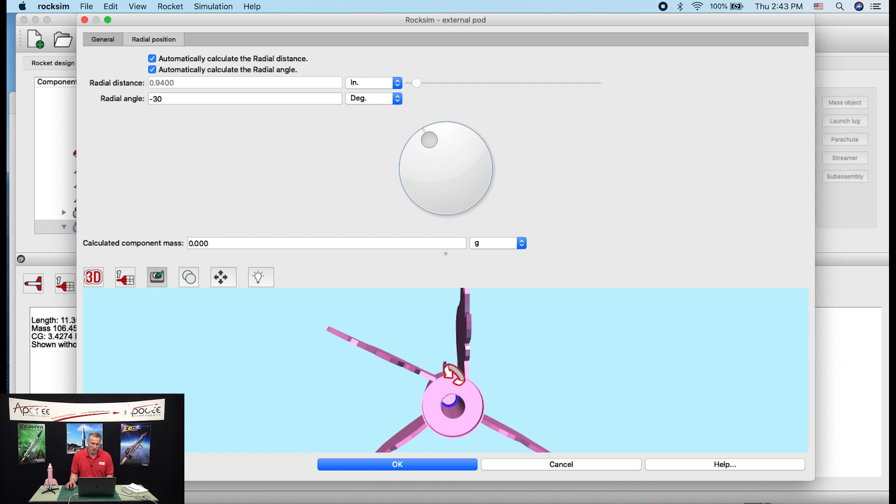So now we're going to edit this. We're going to edit the starboard wing pod. We're going to change the name of it for the first thing. We're going to call it the port side wing pod. Okay, and then we're going to go to that radial angle, so we can adjust it to 30 degrees the other way. So it's going to be minus 30 degrees over here. And hit tab. And you can see that it's off to the side there a little bit, but we know how to fix that, right? So we're going to click OK here.

I'm going to go to my port side wing. And in fact, I'm going to change the name of this one too. I'm going to call it the port side wing fin, because it's not a set anymore. A set means more than one. Okay, so we got the name changed.

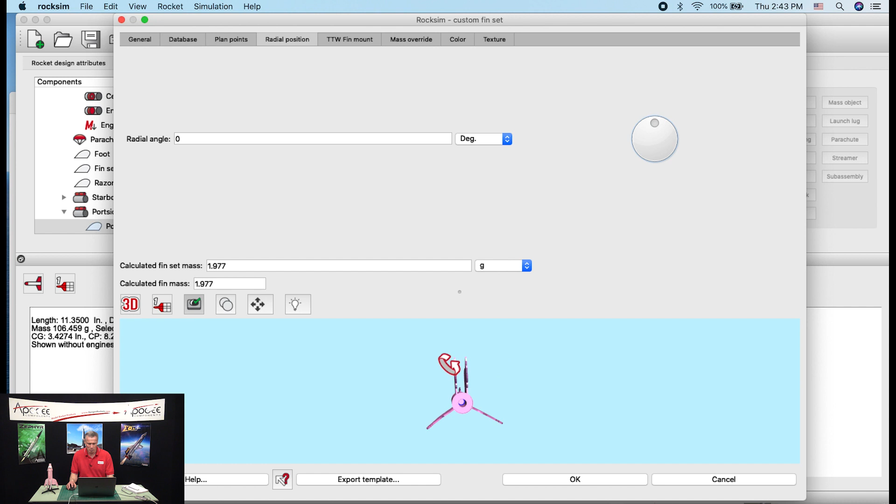Now we're going to go to the radial position tab. Click on that. See, it's minus 60 degrees. Let's try changing it here. Yeah, we're going to make it 0 degrees. So hit tab, and now we have that fin up and down. The name has been changed. We're going to click OK.

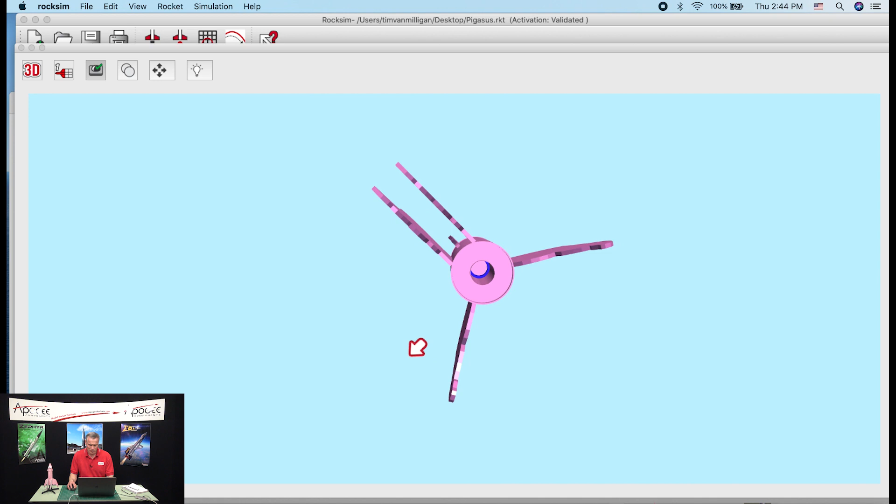I'm going to go here to 3D view. And if you want to make this bigger, you can double click here. Right there. Detach it. Oh, it put it at the top. I didn't want it at the top. Detach it and make it bigger. Okay, so you can see now those wings are up and down.

Now doing the Lex Jet will be almost identical to what we did here. The only thing that's changed is the radial angles and the shape. And you're going to have two different ones. You're going to have a starboard and a port side again. And here's our starboard, and here's our port side. So it's going to be an identical process. So that's how you would do it.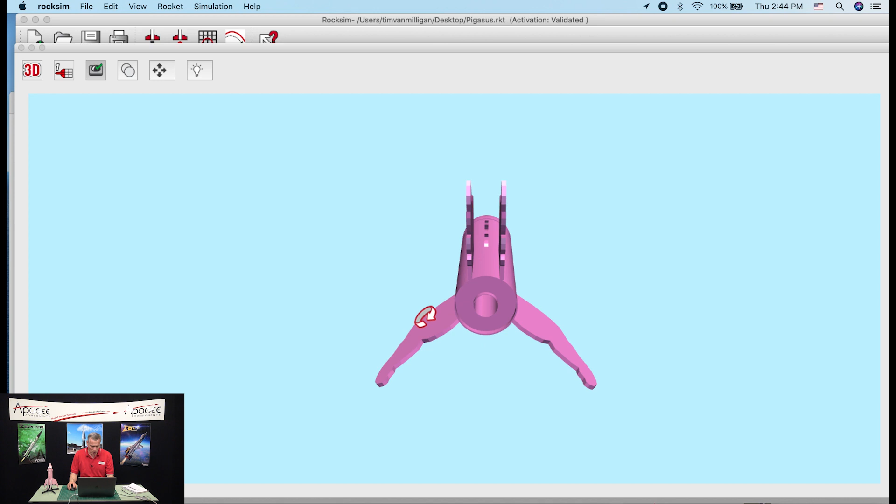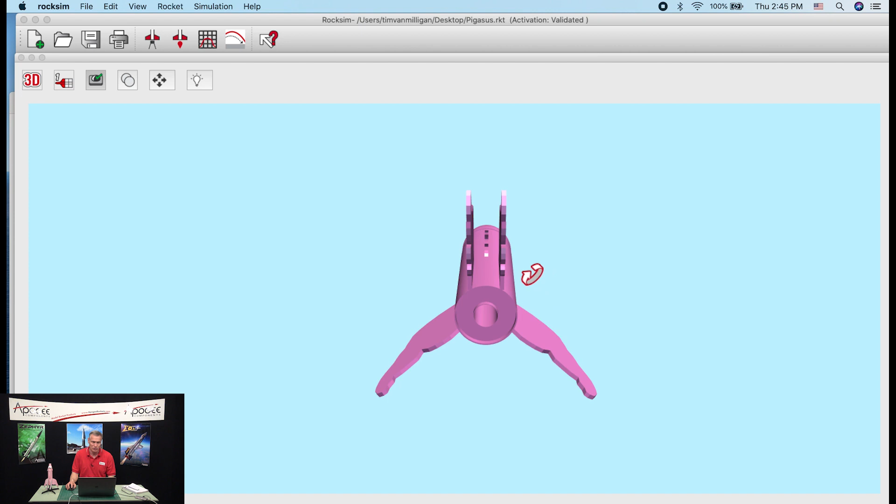Okay, so now one of the questions that people had was, once you've detached this view window from the screen, how do you get it back down to the bottom of the screen? Well, to do that, you go up to the View menu, and you go down here to Restore Window Default, and then it will pop it right back to the bottom of the screen. In case you were wondering, that's how you do it. So that answers the question of how do you make fins that are not coming off perpendicular from the tube.

All right, so that was cool. We're going to save this design. Right now it's on my desktop. I just saved it. And now we'll answer the next question.

This one comes from James Posgate, and he says, I can't print in version 10.1. Okay, James, we've tested printing and it works. But there's a little checkbox that you have to check. So let's go here to print. So here's the print menu. So that brings up this menu right here to print.

And the trick is you have to go to additional settings. Now most people wouldn't even think about this. But on additional settings, right now it's checked. There's a box that says print to a PDF format. And if it's checked, and you try to print, instead of going off to your printer and then it comes out on paper, it's going to go off into your computer as a PDF file.

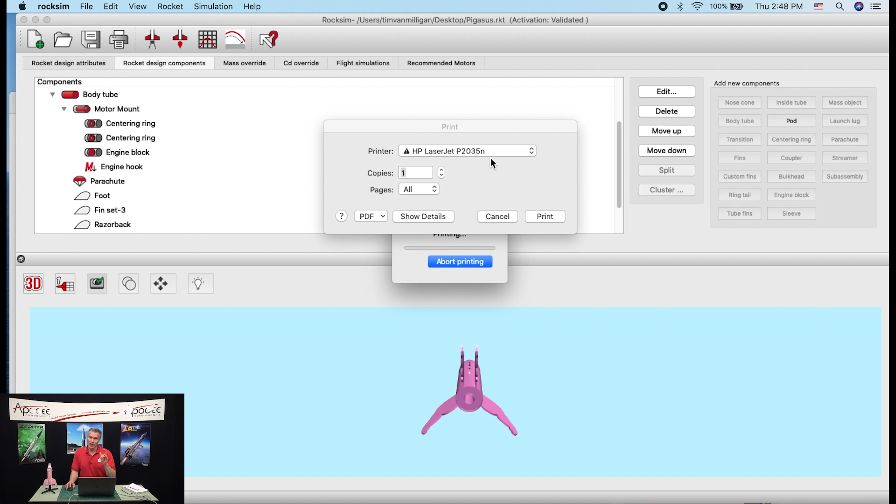So if I print out the port side wing fin and check there, now I'm actually going to print it to a PDF so I can show you. So I'm going to click print to PDF. Okay. I'm going back to print selections. Okay, that's the only thing that I should be printing. I'm going to click OK. And even though it looks like it's going to a printer, it actually isn't. It's going to a file. So we're just going to say print.

And this is how you can tell where it stores it. So it says printing to, and this is the location, into my application folder, into my RockSim 10.1, build 175, and PDF prints. So I'm just going to leave that there. I'm going to go to my application folder, and I want to be able to see that so I can actually look at the file path to be able to find it.

So it's in my applications folder, and then I go into RockSim 10.1 build 175, which is that folder right there. Open that up, and then there's a folder called PDF prints, and here's my PDF prints. I'm going to open that. I probably didn't print it until I hit OK. And look, there it did. It showed up right there. So if I open this,

there's the fin that was drawn using the custom fin editor in RockSim, and that's a full 100% scale fin. Now from here I can also print it, so I can just select print, select my laser printer, and then hit print, and it's going to my laser printer out there, and I'm here in this room, so I won't even see it for a little bit.

They're gonna come walking in. Tim, did you print out a fin? And I say, yeah, I did.

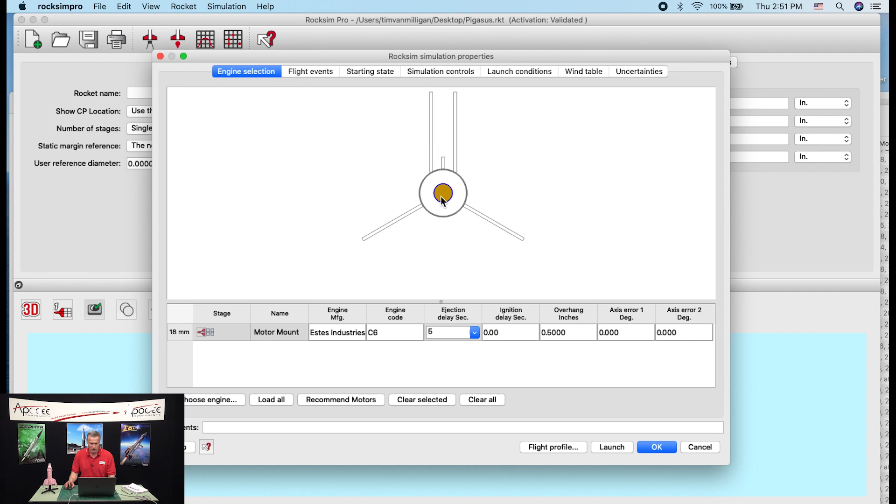The engine's going to hang out the back a half of an inch. So I'm going to put 0.5 and click OK. And you can see here on the middle of the screen here, it loaded that motor right there. Now I'm going to go to flight events, and I'm going to say deploy at maximum ejection delay. Simulation controls. Okay, the starting state, we're going to have a 36-inch launch rod. Launch guide from vertical. Let's angle it maybe 10 degrees.

Our azimuth. Azimuth is a compass direction. North would be 0. So imagine this is a compass rose. So north is straight up on your compass. If I go this way, I'm over to the west. So let's launch it kind of like northwest. And under launch conditions, I'm not sure where this is located. So let's choose a launch site.

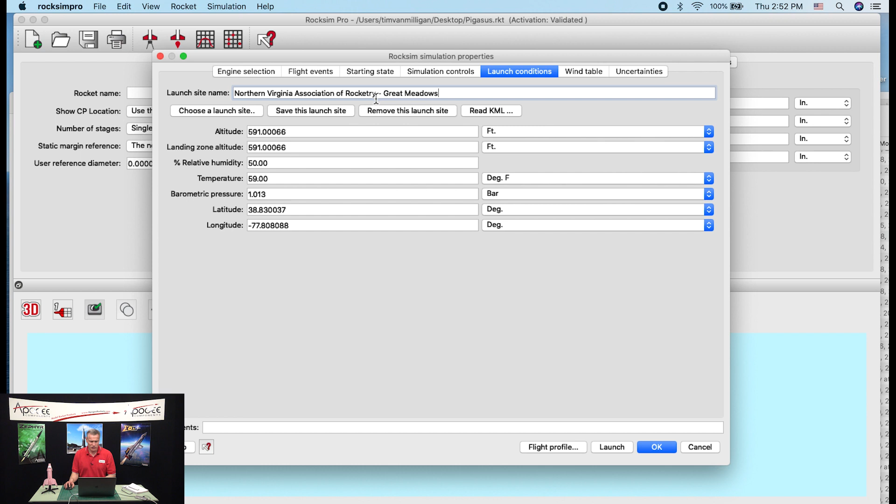Let's go the Northern Virginia Association of Rocketry launch site, and this is where the TARC launches are held every spring, so that's appropriate. And let's check our wind. Right now we have a wind coming out of the west. So this is a compass direction again, so 270 means coming from the west, and it's 8 miles an hour. So let's see what that looks like when we run a flight profile.

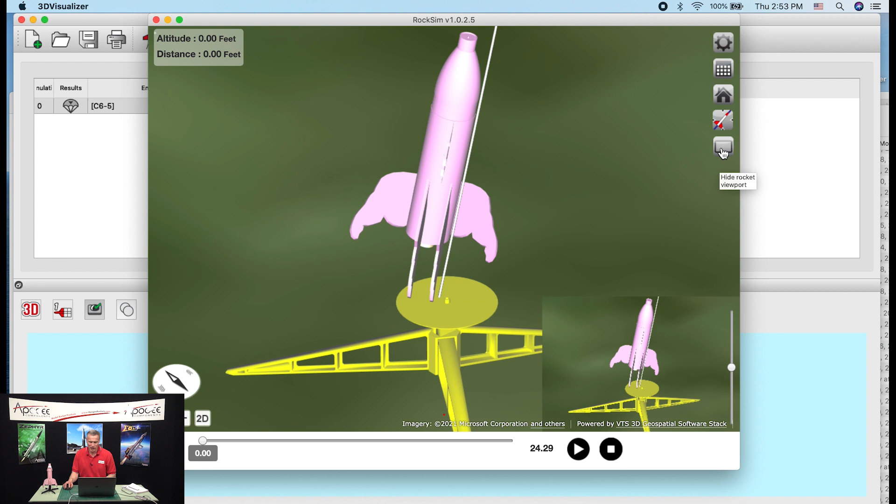So here we're launching. Oh, I know what it's doing. It's doing multiple launches. It's doing 8 of 10 launches. We only wanted 1. I had uncertainties turned on there, but we don't really need an uncertainty. So here's the rocket sitting on the launch pad, and we got a small view of the same rocket right there. So let me hide this right here so you're not confused.

Okay, so there's the rocket, and I'm going to use my mouse to scroll out to kind of get a lay of the land, where this rocket is located. So here we are in Virginia. Here's a compass down here. The black triangle points to the north. So this coming off this direction is the north, and if we want to swing that around, I'll just grab it and swing it around so it's going north.

Okay, so my rocket is right there in the middle, and you probably can't see that, so I'll zoom in a little bit again. And let's click the launch button and see what happens. So the rocket takes off, and this is a funky rocket with fins in weird locations. So I don't know if you saw it there when it came off the launch rod. It came off a little squirrely.

So now it's drifting back down, and it's going to be down to the ground here in just less than 10 seconds. You can see it's going to land, and as soon as it gets to the ground, I'm going to hit pause so that it doesn't restart. Okay, so then it lands way out here. You can see over here, distance from the launch point was 341 feet. And I'm going to zoom out again so we can get a little better lay of the land.

And you can see this red line right here is the ground path. The green line is the trajectory. And then these vertical lines, it just kind of connects the ground path with the vertical trajectory. So it kind of makes it kind of a 3D image. And I'm just rotating it around, just kind of seeing what's going on.

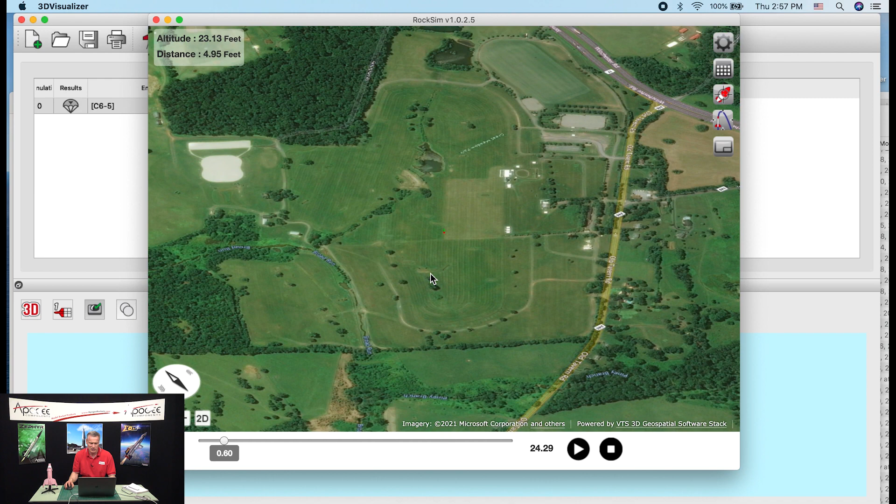So right now the rocket is coming off, and I want to look at it a little bit. Oops, I didn't change the view. So I got to change that view, and the camera reorients itself, and now I got to reorient the camera. So I'm going to zoom in, and I'm going to rotate around. So remember, north is going this way this time, so it's pointing this way.

The wind is coming from the west, so you see this red line here? You can see that the wind is actually pushing the rocket as it's taking off. And let me back up the trajectory a little bit. So as it's climbing off the rod, as soon as it leaves the rod, it's being pushed, which is so cool. You can see the ground trajectory. Now here, the rocket, something's going on. It's trying to straighten itself out, which is really cool.

I'm going to zoom out a little bit and pan down a little bit so we can get a different perspective on it. So now these vertical lines, they're coming off the rocket at 1 second intervals. So 1 second after the rocket left the pad, it would be at this point. You can see we're already at 1.4 seconds down here on the bottom. So we're getting a lot of information here just by looking at a trajectory in the flight visualizer.

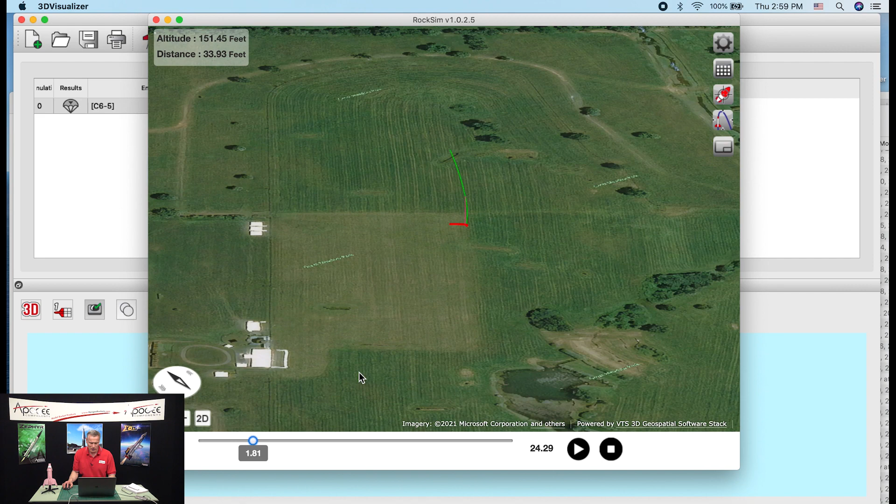You can see it's also starting to arc over. So if north is straight up, it's arcing over to the northwest, and we angled it kind of northwest, so we anticipate it going in that direction. Okay, and the rocket takes off, and this red dot right here, that's the apogee point in the flight. And let me back it up just a little bit.

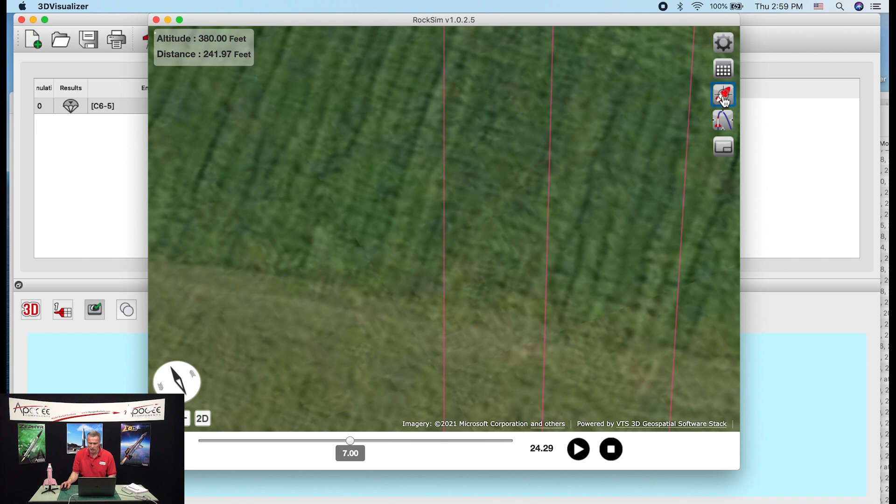Let me zoom in. If you ever get lost, when you're in this viewport right here, you get another button up above it to center the camera on the rocket. So I'm going to click on that, and you can see it just moved the rocket dead center in the middle of the screen. And if I zoom in and then click that button again, it will recenter. At this point, I want to zoom in really close, because now the parachute is out of the rocket.

And we want to find out where did the parachute pop out. So right here, between 6.86 seconds and 6.81 is when the parachute opened. And at that point, the rocket's trajectory put on its brakes. It stopped going towards the northwest, and now it's being pushed by the wind. And then from this point out, it will be pushed directly to the east by the wind.

So if we look at it from the top view, looking straight down from bird's eye view, and you can get that view by clicking the 2D button over here in the bottom corner. Now we're looking straight down on the rocket, and there it is. So north is straight up, and you can see it's drifting straight east as it's coming down. And then, as we discovered before, it's going to be about 341 feet away when it touches down.

All right, so that is RockSim Pro with the launch visualizer. The launch visualizer is this screen right here, which shows you the trajectory of the rocket. That right now is going to be only in RockSim Pro, and we're going to be releasing that soon, so I'm kind of giving you a little teaser. I apologize that it's not available yet, and when you ask us, when's it going to be available, Tim? The answer is going to be soon. Because there's always last minute things that get in the way of getting this out the door. But the visualizer, as you see, is working fine. We are putting the finishing touches on everything else in the software.